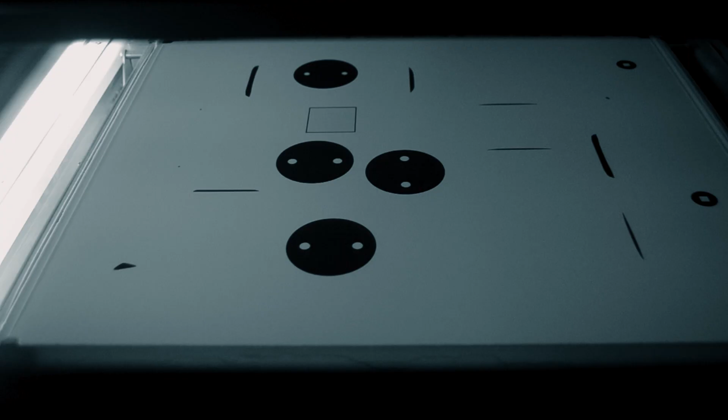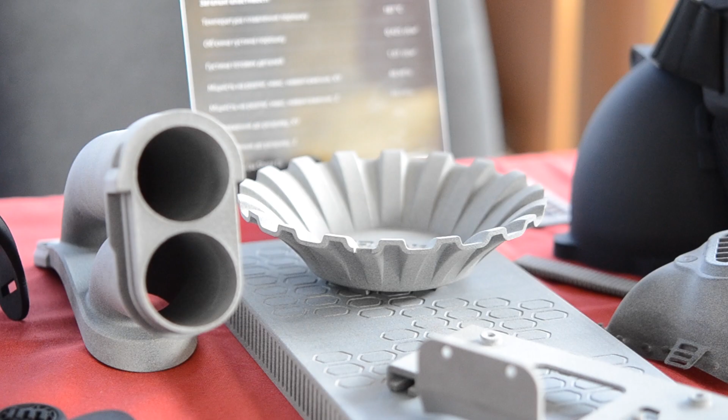In additive manufacturing, success and profitability can be influenced by various factors. Among these, arranging multiple components in a three-dimensional space to maximize the use of a 3D printer's build volume is crucial. Fusion's True Shape innovative voxel-based arrangement method significantly enhances efficiency, reduces waste, and optimizes production processes by considering the actual shape of the component, thereby producing superior results during the packing process.

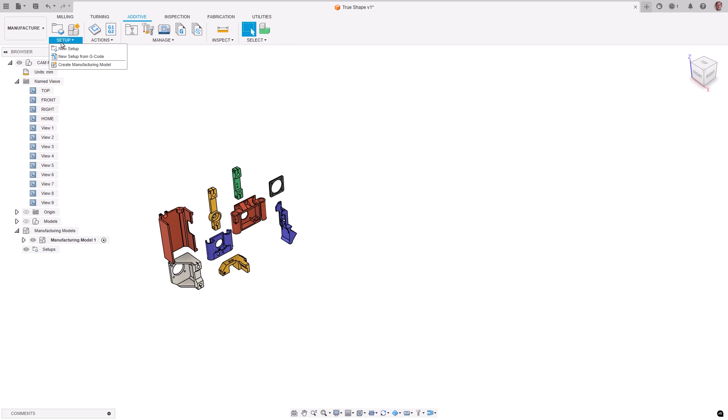Let's see how this arrangement method can pack components for a more densely packed build. After creating a setup, the option to arrange the parts for printing is available. In this situation, we have a group of parts that need copies created and packed efficiently in the build volume. From the selection of arrangements, the True Shape 3D Arrange can be chosen.

The rotation and priority for each part can be set individually if desired, or a global setting can be used to control the packing for all parts. To print multiple copies, select the option and input the desired number. In the rotation section, it is possible to specify how the part can be rotated during packing for the X, Y, and Z axes individually.

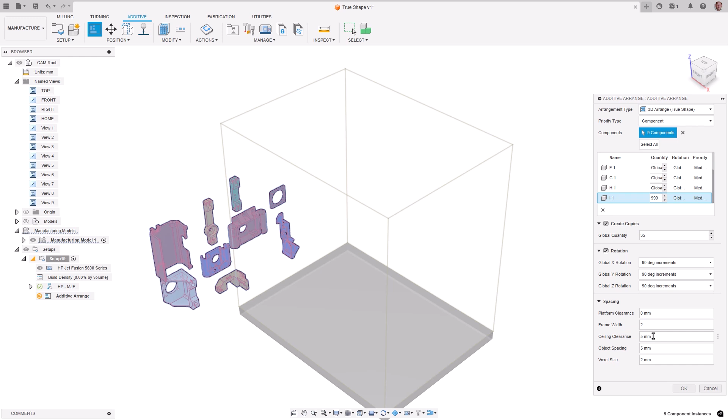Next, select the clearance and spacing values for the platform and the parts. By selecting OK, the True Shape algorithm will quickly pack the components and their copies into a dense 3D arrangement in the printer build volume.

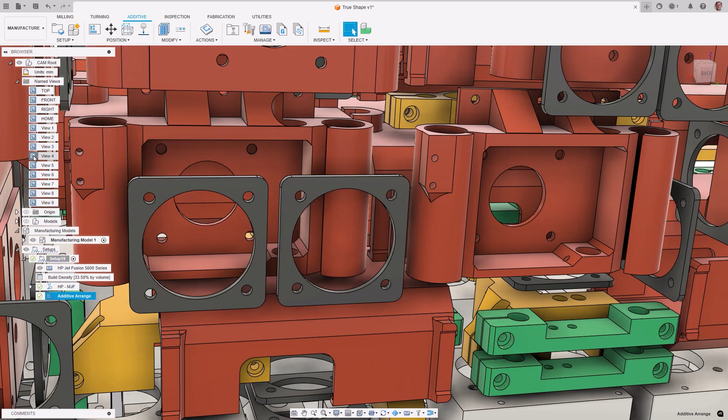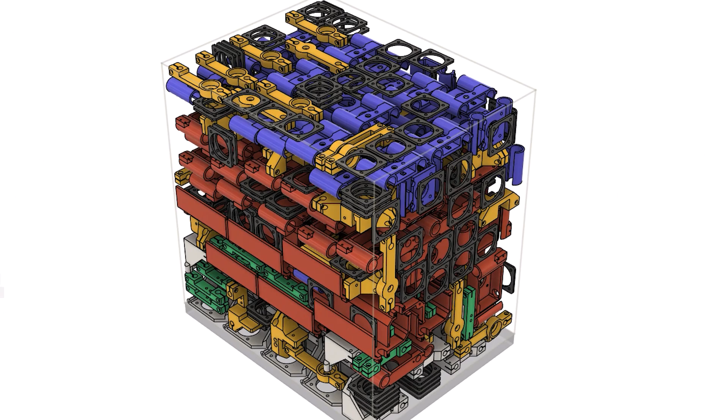The Fusion True Shape Arrange is an essential tool for additive manufacturing. It optimizes the placement of components for 3D printing by considering both the actual shape of each part and their arrangement within the build volume. This process enhances productivity and minimizes machine downtime, as fewer print cycles are needed to produce the same number of parts. Consequently, it ensures that your additive manufacturing processes are efficient, leading to increased production and higher profit margins.